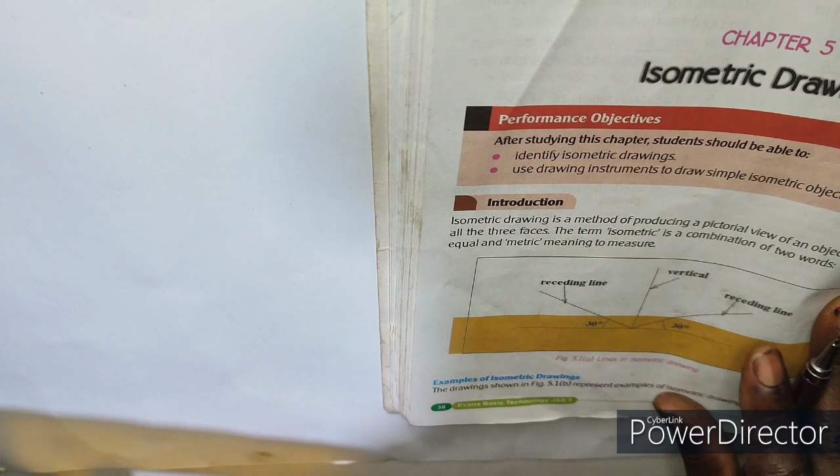To draw an isometric drawing, first, what is an isometric drawing? Isometric drawing is a method of producing a pictorial view of an object which shows all three faces. The term isometric is a combination of two words: iso meaning equal, and metric meaning to measure.

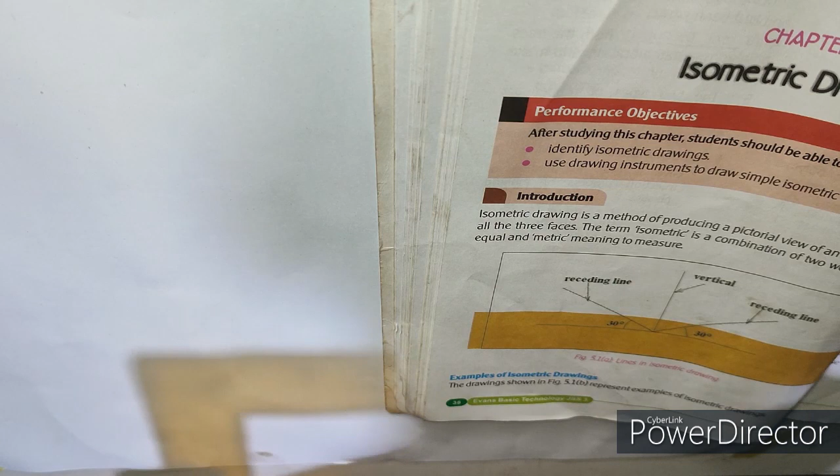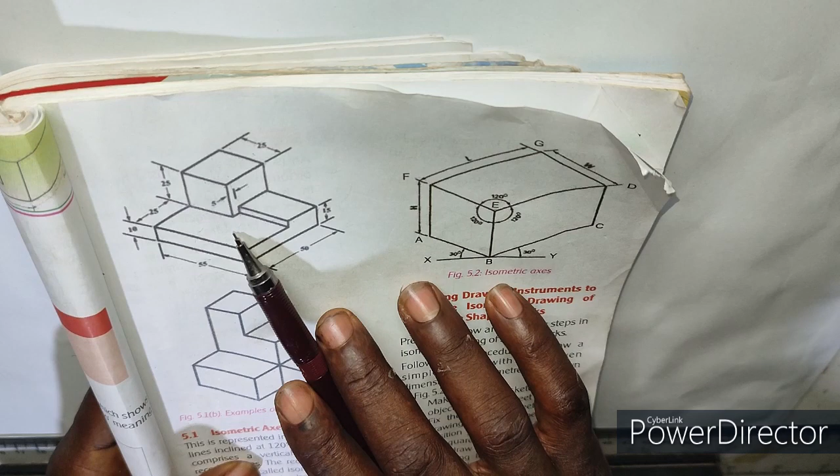First, you draw your plane of projection, or line of projection. Now draw a horizontal line, then locate a center, or the lowest point where the object is to start from. Now, the isometric block I want to draw, I will produce it as it is, like this.

So now let's see what the first step is. The receding lines, this line and this line, with the vertical ones. Now this is 50 millimeters, this is 55 millimeters. So let's draw that using the set square, and we use the 30-degree edge side. The 30-degree edge side is what we use in isometric.

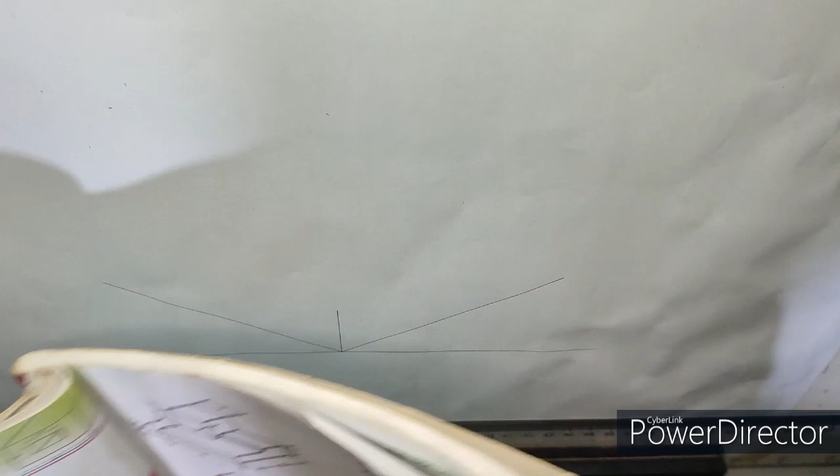Now, as you can see, my 30-degree set square is sitting on my ruler and on my T-square. So I'll produce the receding line to the right and left, without any measurement. Then this side too, without any measurement. Then the center, I'll produce it to be long, without any measurement. After drawing these receding lines and the vertical lines, this line is called the receding line, and this one is called the vertical line. The angle here between the plane of projection and the receding line is 30 degrees, 30 degrees, 30 degrees.

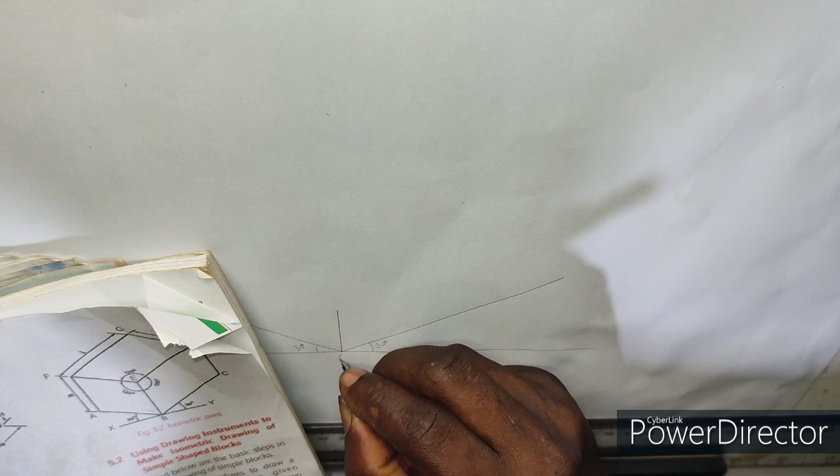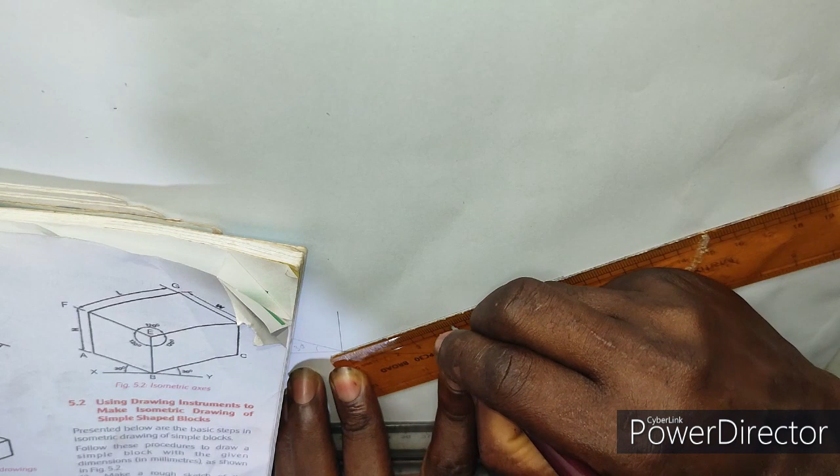I'll now take a measurement from here. This is my lowest point, also called the point of origin. I will now take my measurement. From the lowest point above is 50 for this side, as I've said. So this side is 50, and for this other side is 55.

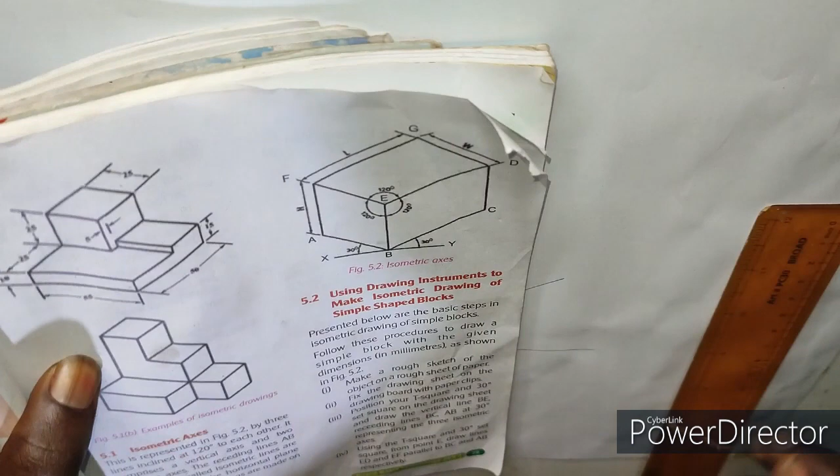That's 5.5 centimeters. Here it is. Good. So this side is 10. Now, this side is 10 from here. If this side is 10, then this side will also be 10.

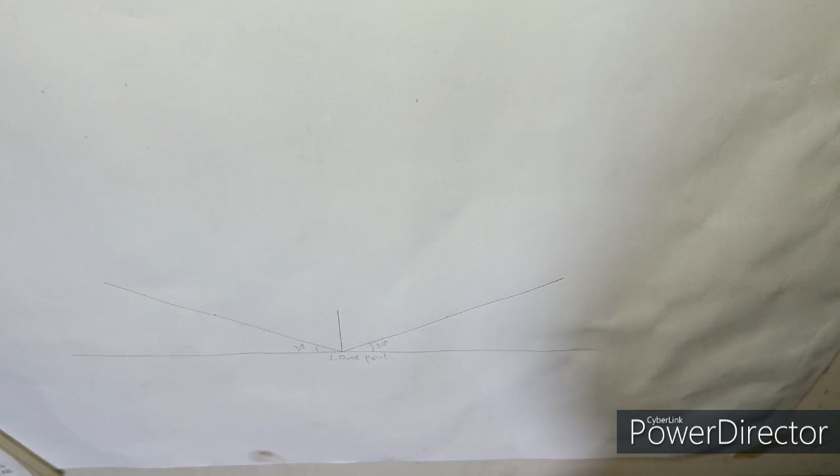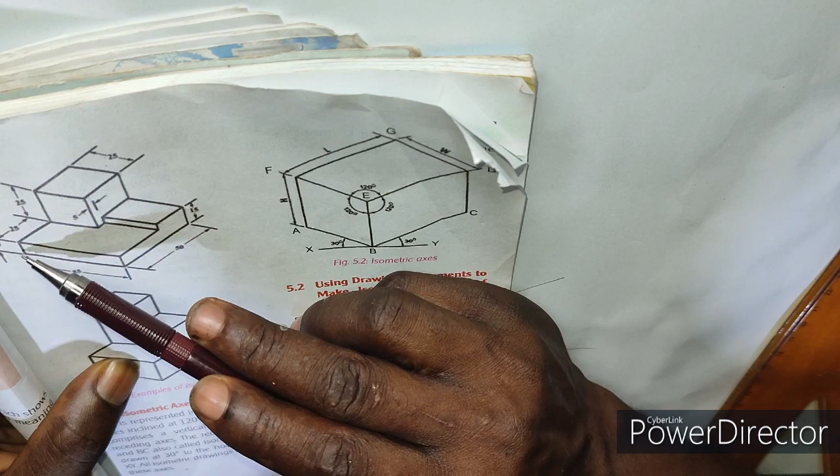So then after that, on those points now, I will make another drawing. On this point, I will draw another receding line above this starting receding line. This one is 55, so this one above will also be 55. Then I will also raise this point up by 10.

Once I draw this receding line, I will join it here, then produce another receding line towards this side. Meanwhile, from this point of 50, I will draw it up, a 3 millimeter line on it.

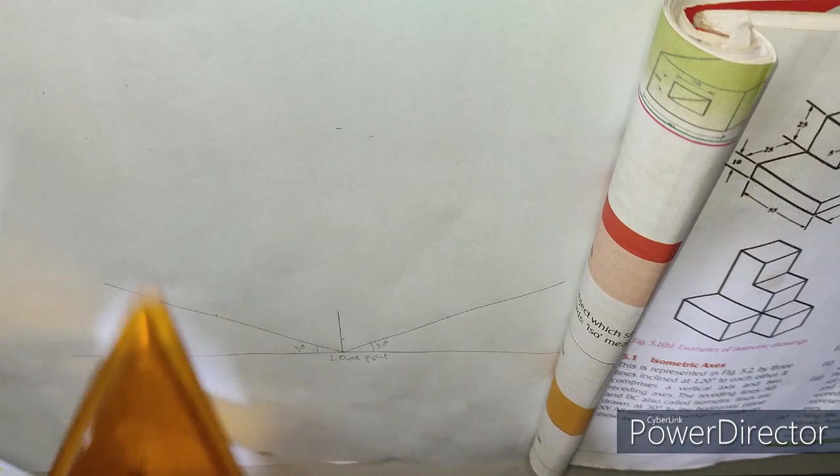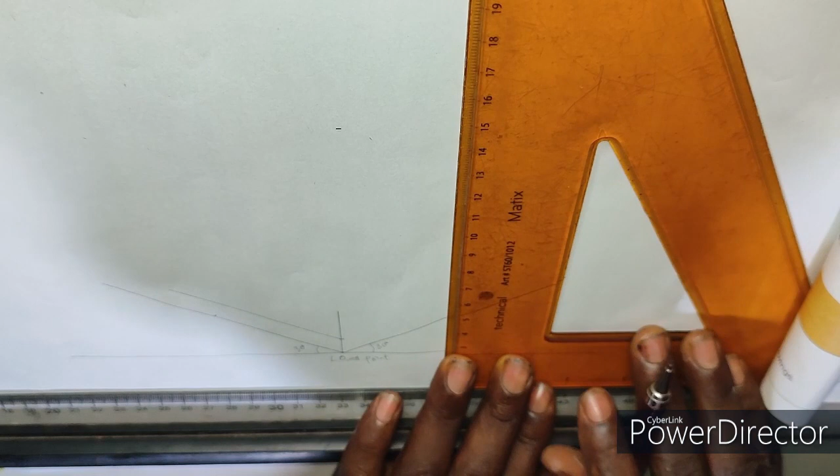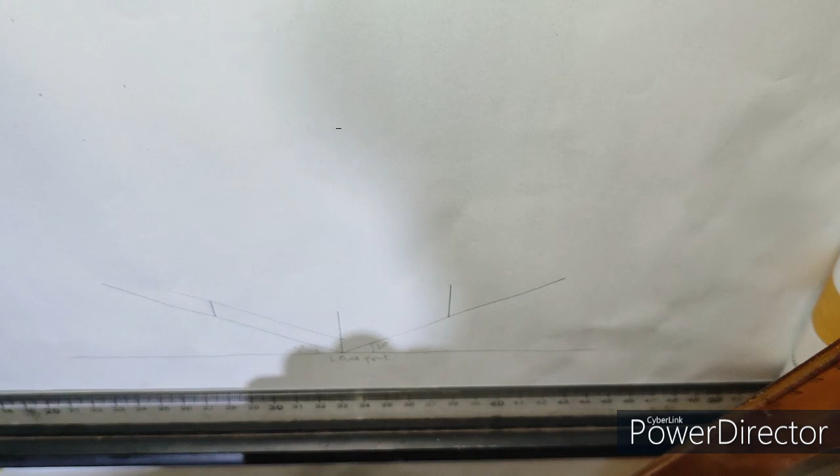On this side, I'll produce another line. Now here, I don't need to measure it again. Once I produce the line up vertically, it will be equal to this one because it's parallel to this. Then this side I will measure 15, that's 1.5. Is it here?

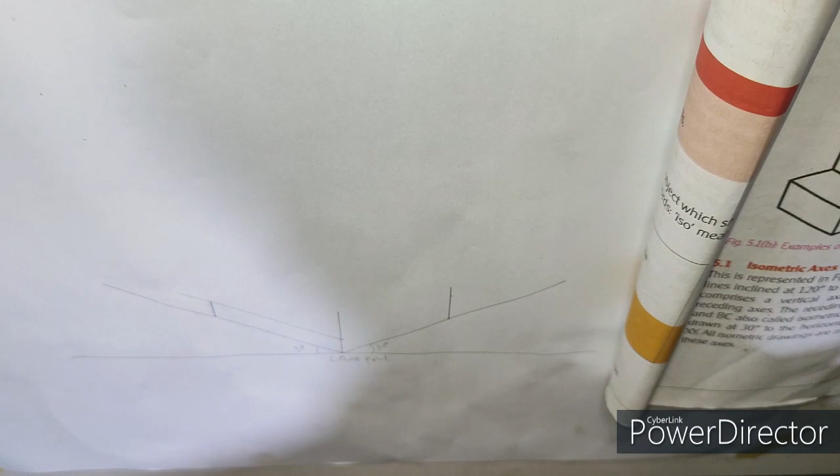Then I haven't done that. Then I'm coming to this side now. So I'm coming here now. I'll produce this one and this.

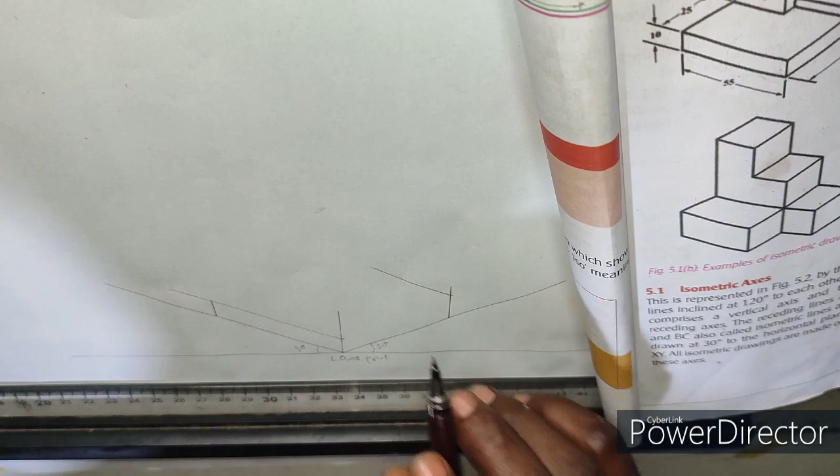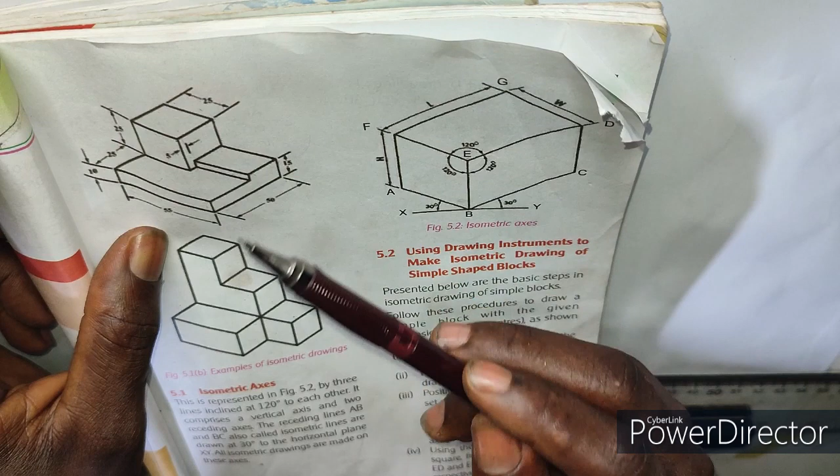How do I know the measurement that is meant to be here? Now, if you look at this side, this is 55. Then from here, this side is equal to this side. All these lines here are equal to each other. This side is equal to that side. So now we have from here to this point to be 25. Then from this point to this point is going to be 55 minus 25, which is 30.

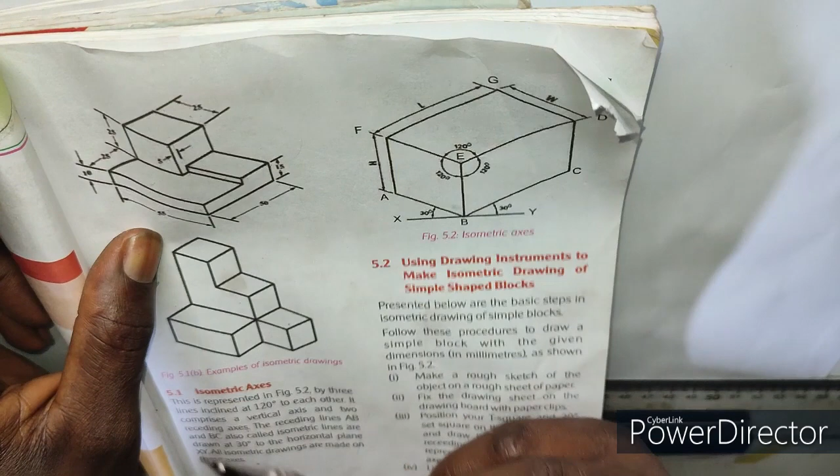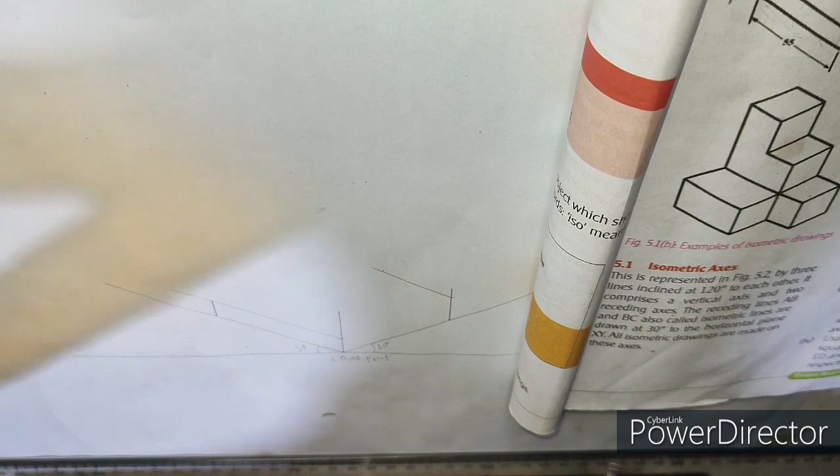So we have 30. This side is going to be 30. I'll measure 30. Here we go. So that's going to be 30. Once you have done that, you produce this side, and that side will take the measurement too.

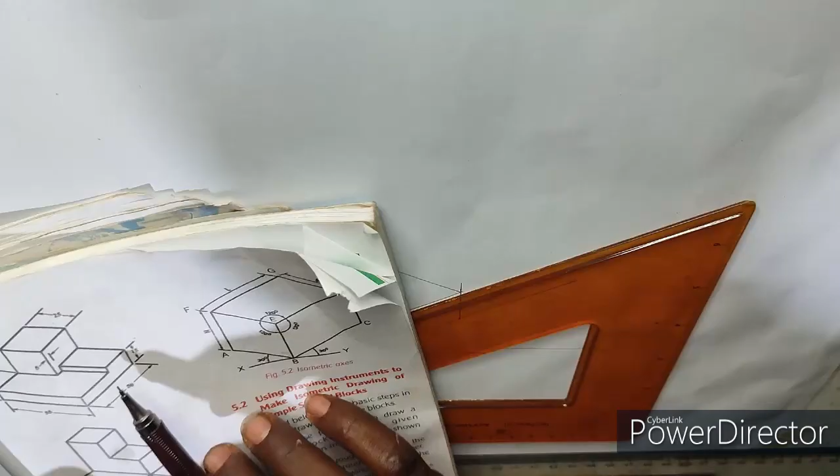I've taken this side and we know the measurement. We'll also draw it to this side. Good.

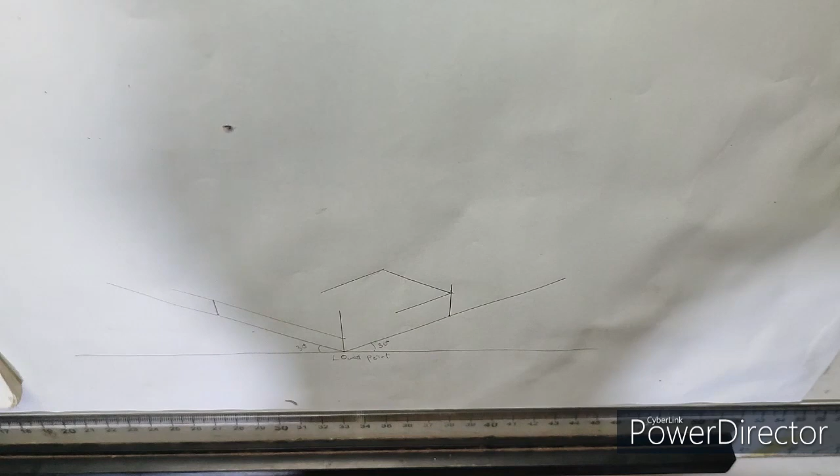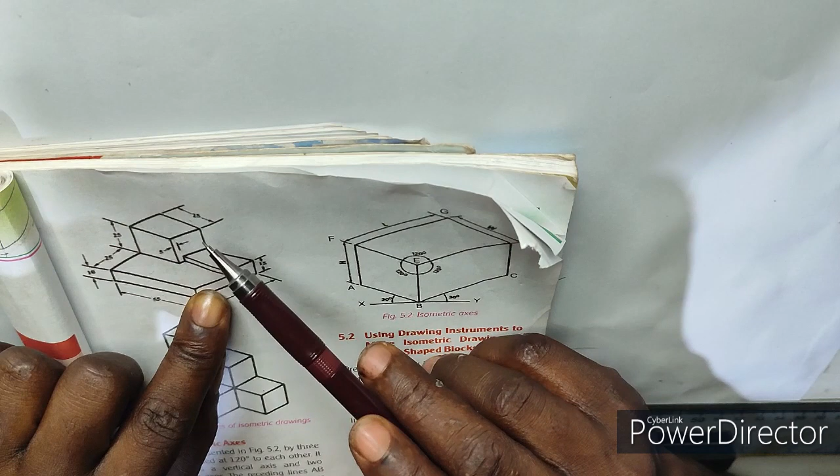Now I'm going to take the measurement also. What will be the measurement? If you look at this side, it's 25. This side is 25 because what we have here is a square. So if this side is 25, this side is 25, and here is 25 too. This side is also 25 and this side is 25.

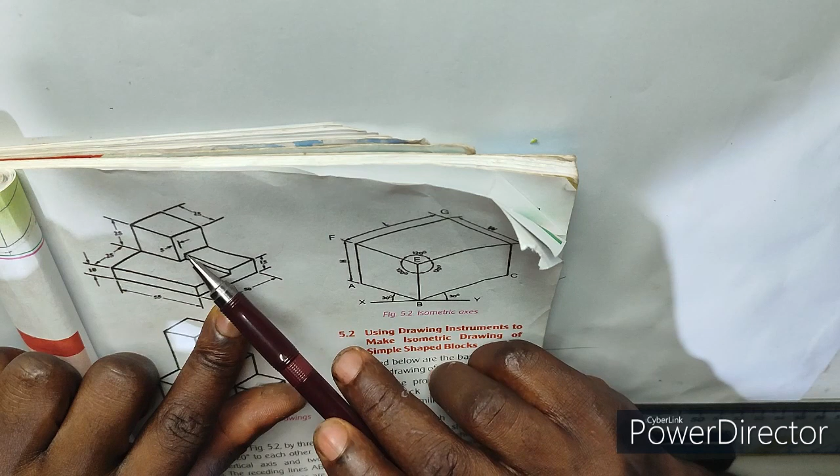Now if this side is 25, this bottom part is also meant to be 25, but as you can see from here, it stops here. We're given the dimension of the remaining part, that the remaining part is 5. From here to here is 5. So if this part is 5, taking that 5 away from 25 leaves 20. That means this part is 20. And if this part is 20, this part also equals 20. So this place is going to be 20 and this place is going to be 20.

So I'll measure this side to be 20, then I'll produce it downward. That's 20. I'm going to draw it this way.

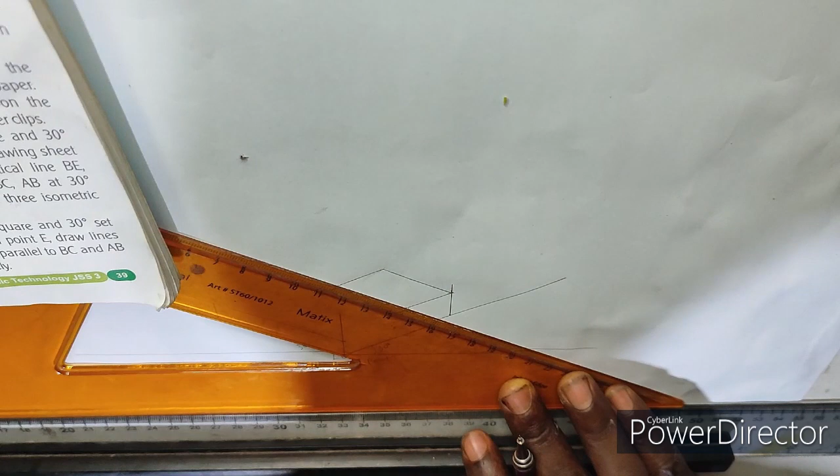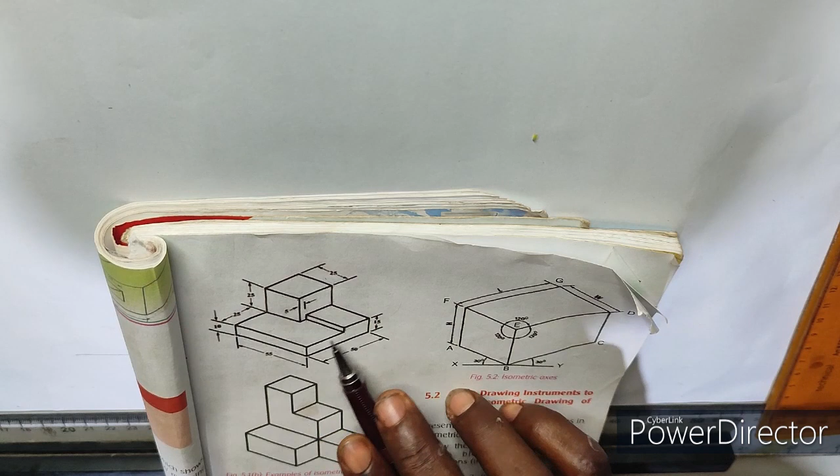Good, and this is the line here. Now this one, I'll drop it vertically downward. Before I drop it vertically, I'm going to draw this receding line that is above this 10 millimeter here. Then I'll now drop it, drop this point downward, to intersect with downward here beneath. Good, and this is it.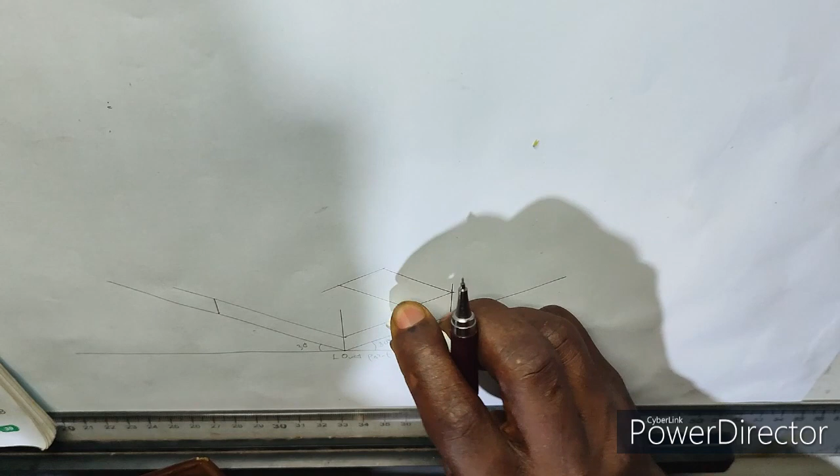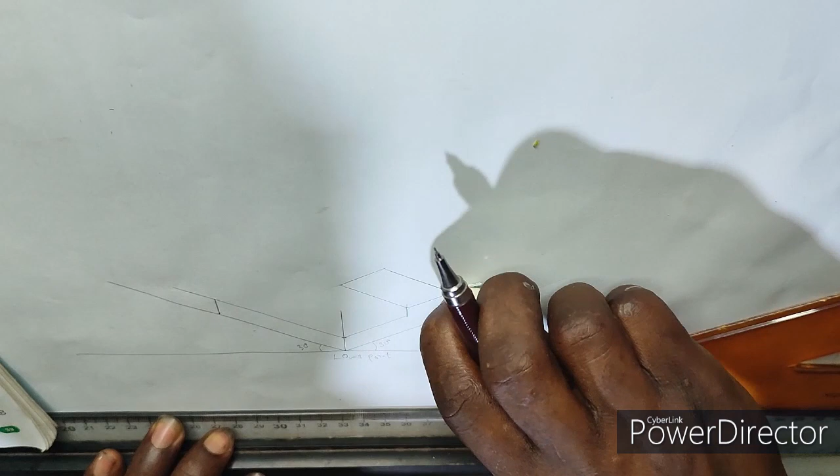Now all this line that extends more out is called our projecting line, or projection line. So it's what we erase at the end, after we've gotten the line we want, or the actual measurement that we want.

So now this part and this part and this part is done. We still have this part that is beneath here. Let's now come to this side. So we are producing it like this.

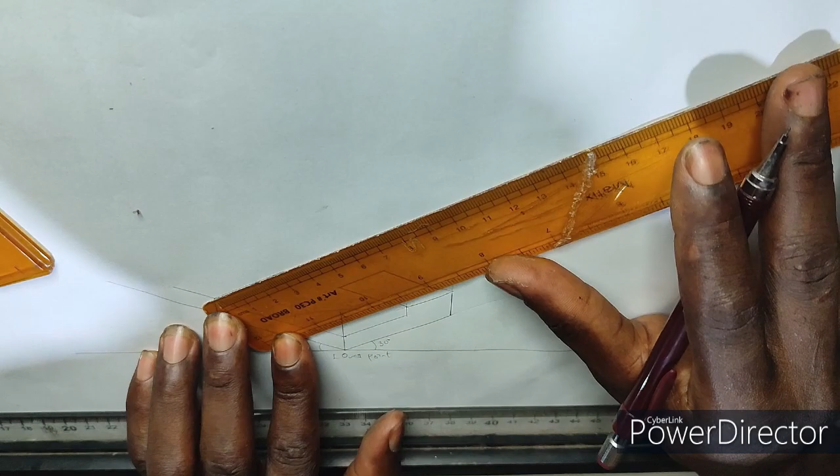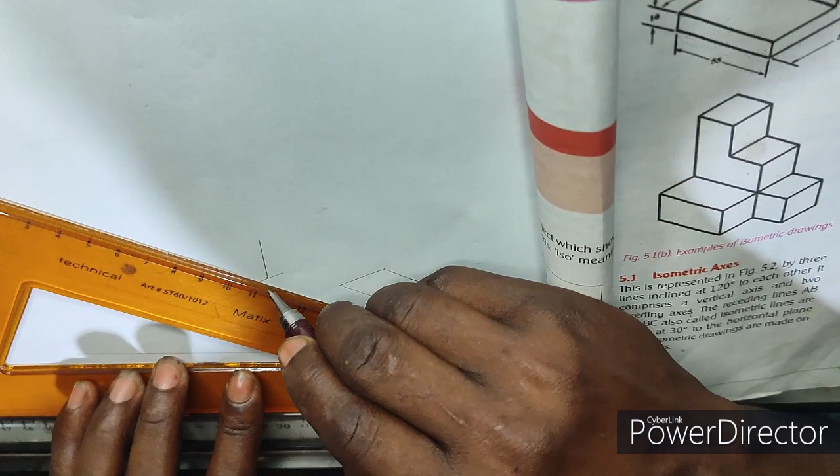All right, it has a dimension, this is dimension 25. Good, we produce this side, which is vertical, then we produce this side, which is the receding line going downward, like this, and it's also still 25.

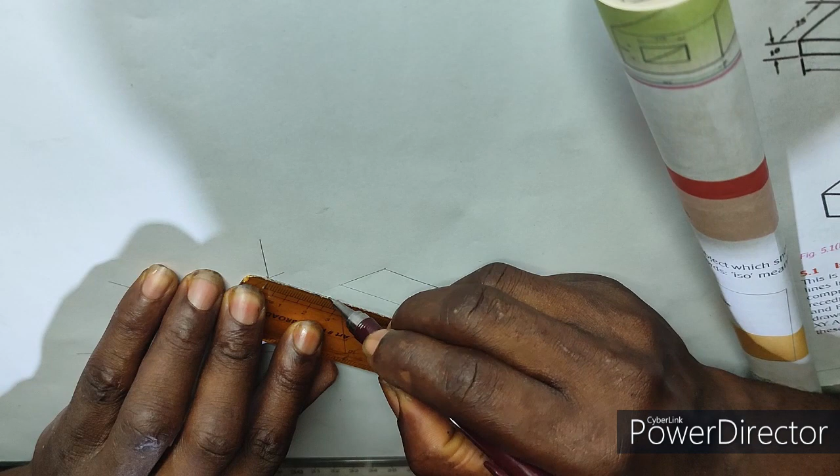Then take the measurement, because the two are 25, 25. Put your point there. I'm going to stop here. This 25.

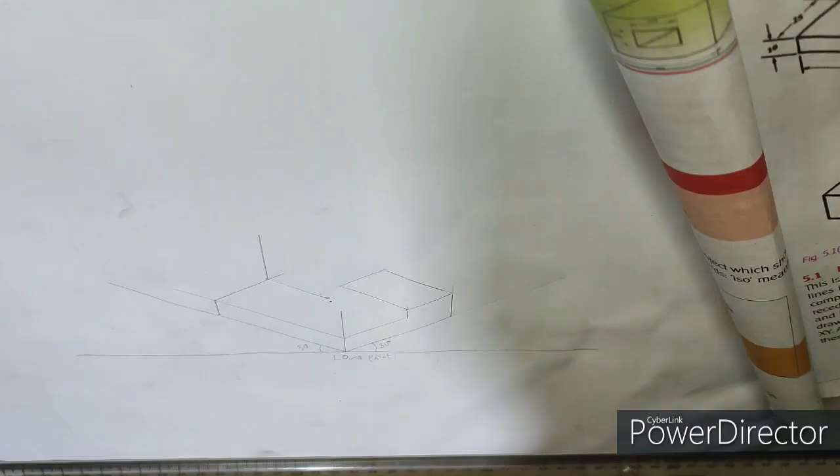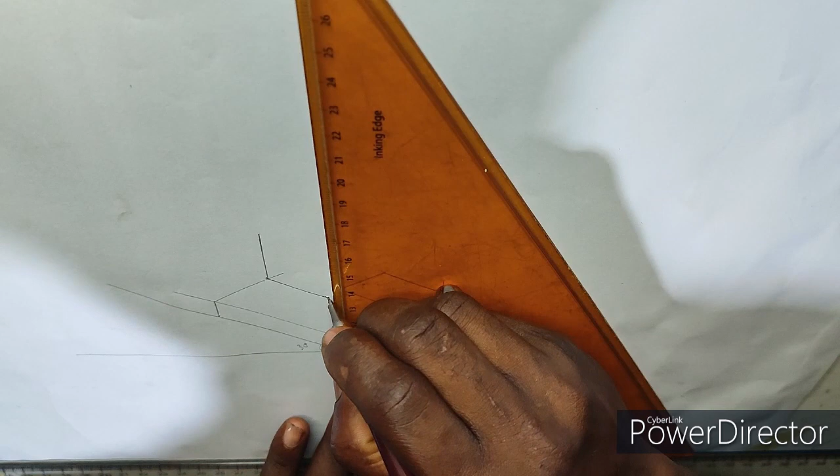Then this upper part. Then at this point there is also a vertical line, so I'll put the vertical line. Now this is 25 already, so I'll draw a receding line to it.

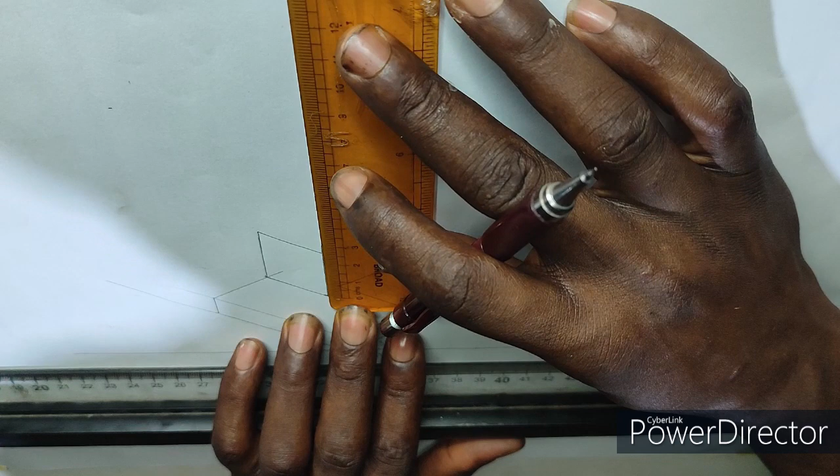Automatically this side is 25 as it is like that. Right, now I've gotten this side. Now it remains this side and this side.

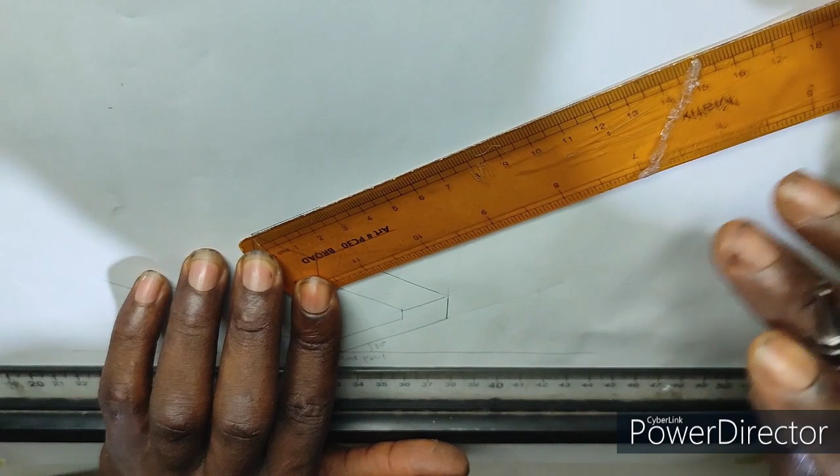So which is like this, taking it from here, this side too. All right, so I'll measure my 25 there. 25. Okay, I'm dropping it here.

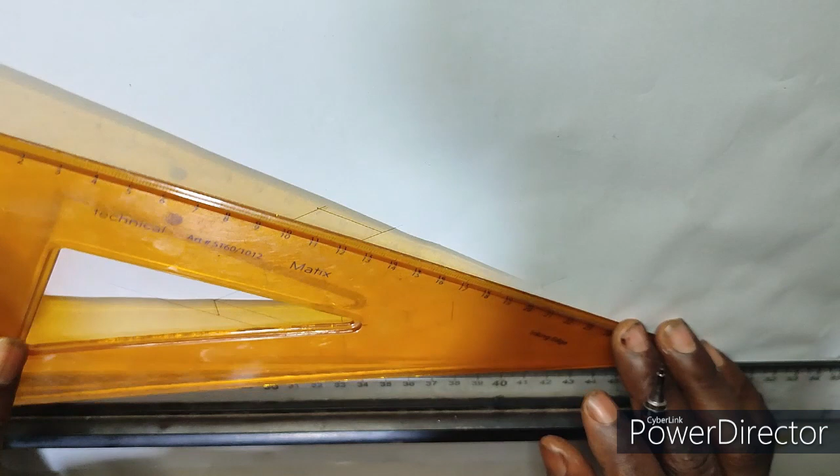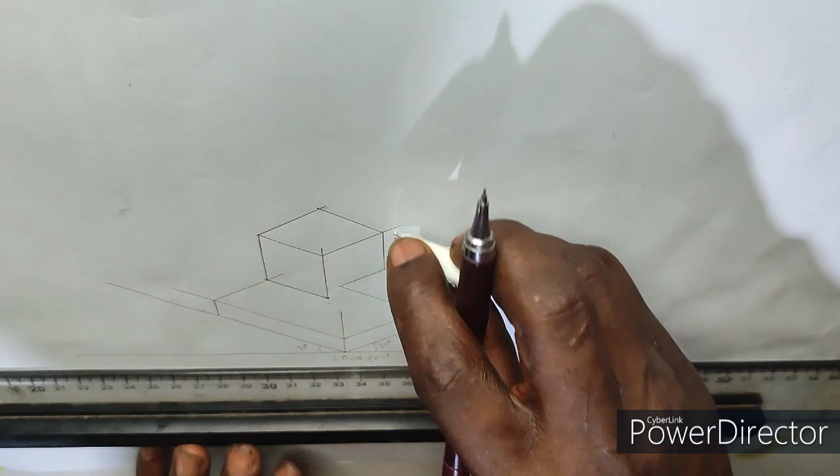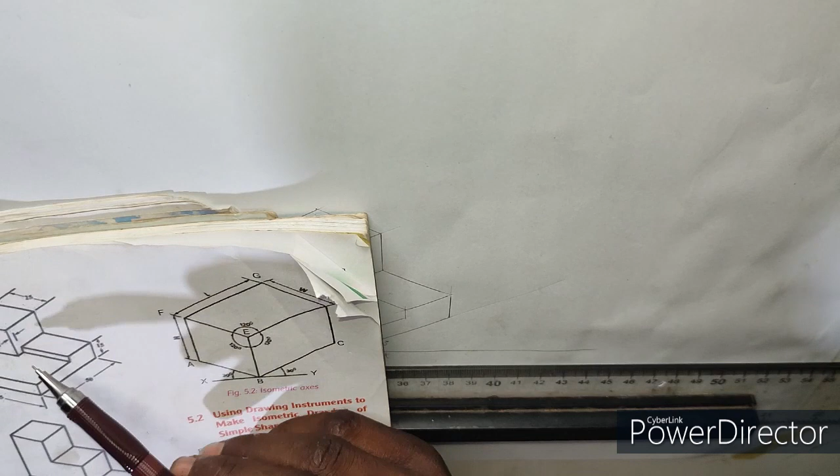Okay, we produce this side, we produce this part. So what is left? We have this side and this side, so just two lines more. So let's produce this one here.

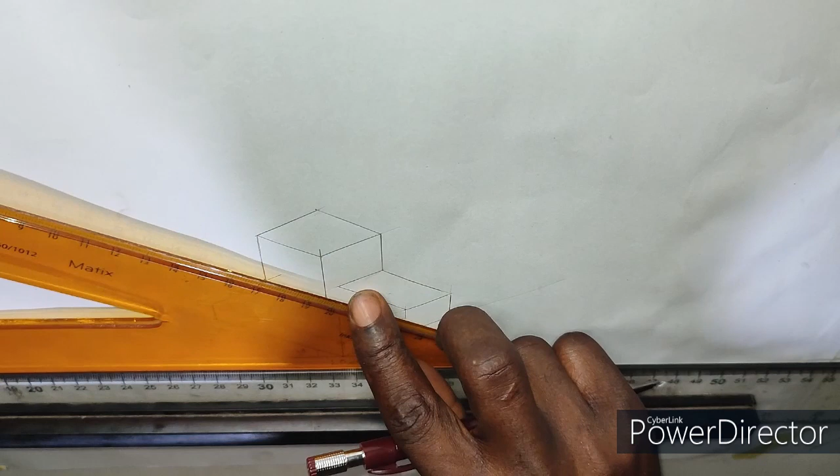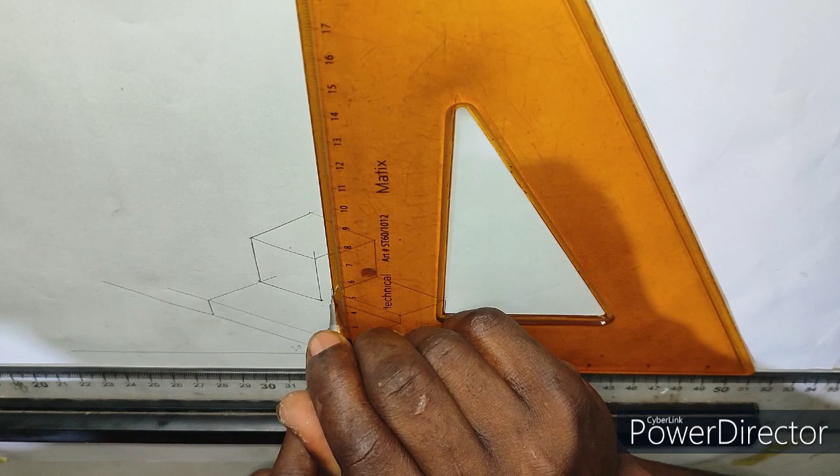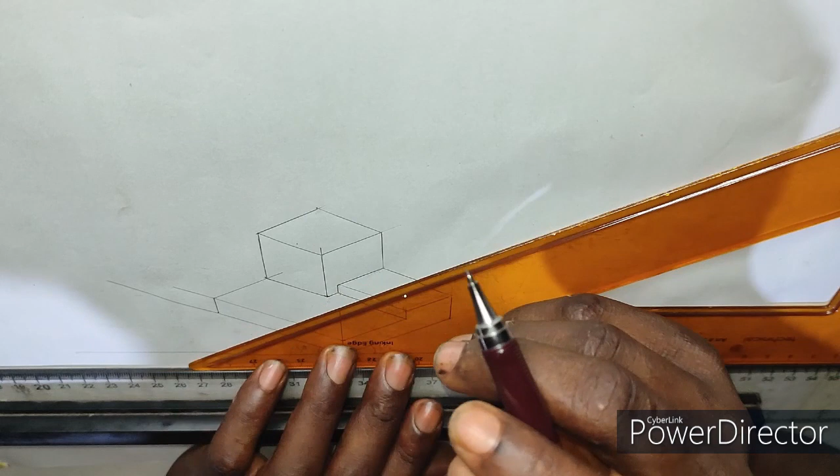And I'm dropping this part horizontally, vertically. So this side is, and line it to each other. Perfect, perfect.

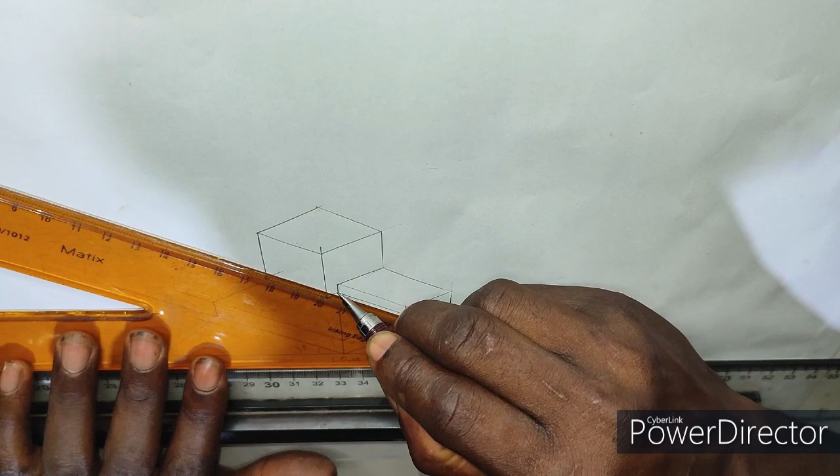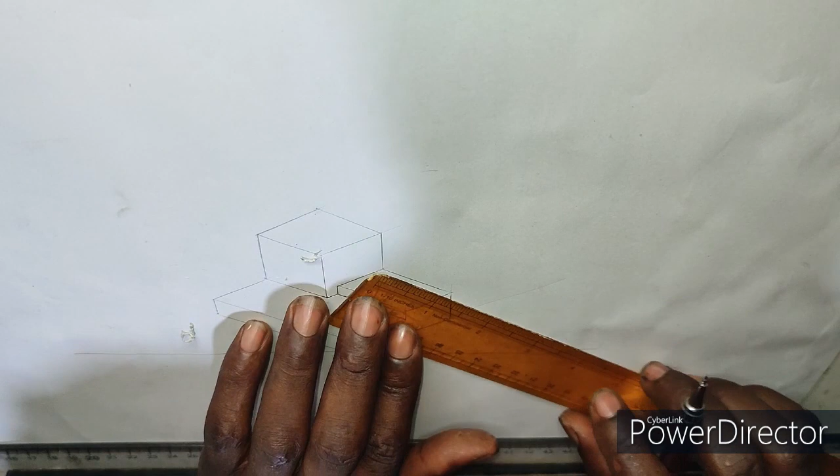We join together at a particular point. The line of our object is called outline. It's called outline. So as we erase the projecting line, we also clean the outline, we retrace it back, we retrace it back with our ruler.

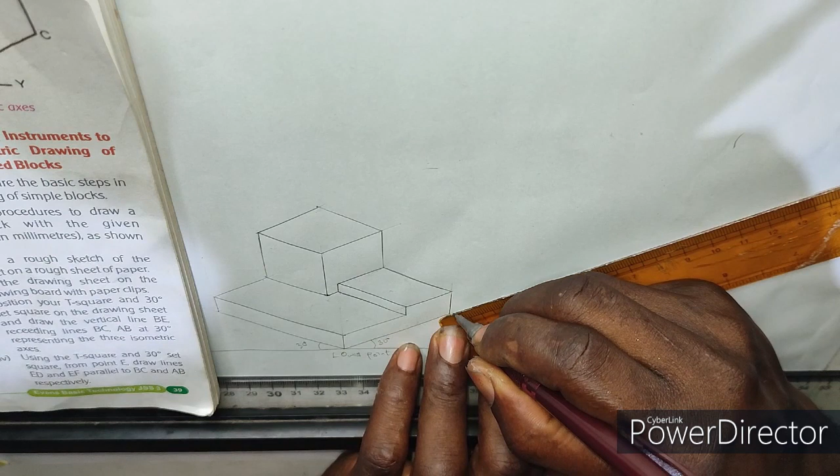And when you are putting your dimension, it's like a projecting line, but it's not going to be attached to your outline. So if we draw a line like this, it should align with the point, the corner, but not join the corner. All right, let's do this like that.

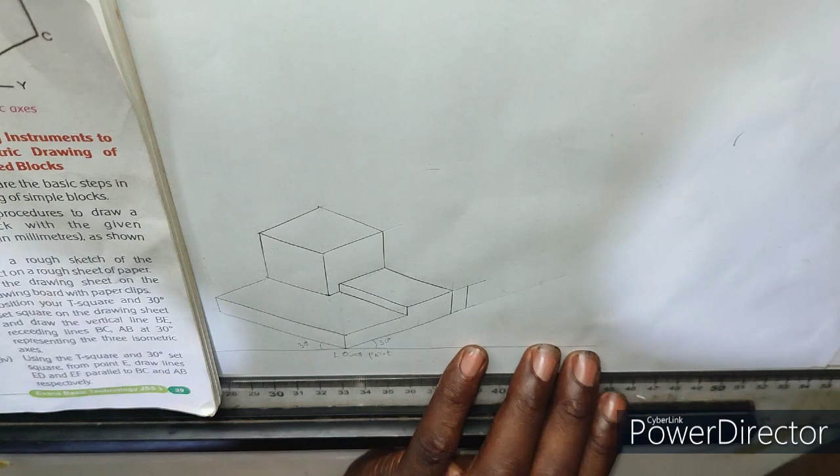This one is 15 millimeter.

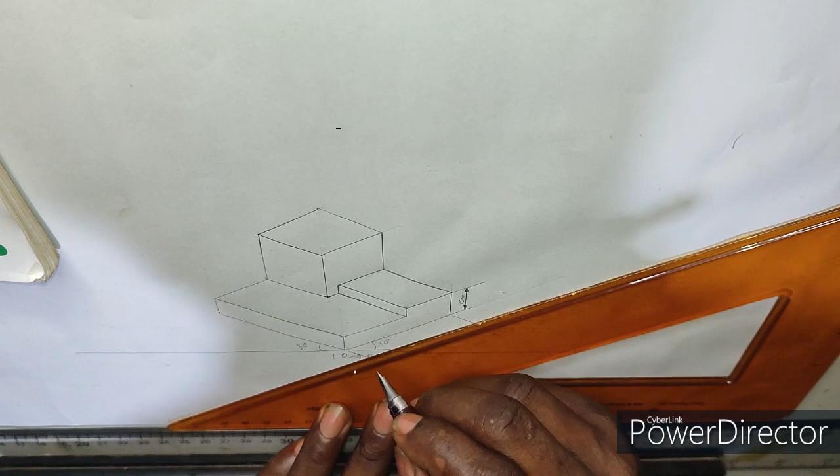This side is 50 millimeter.

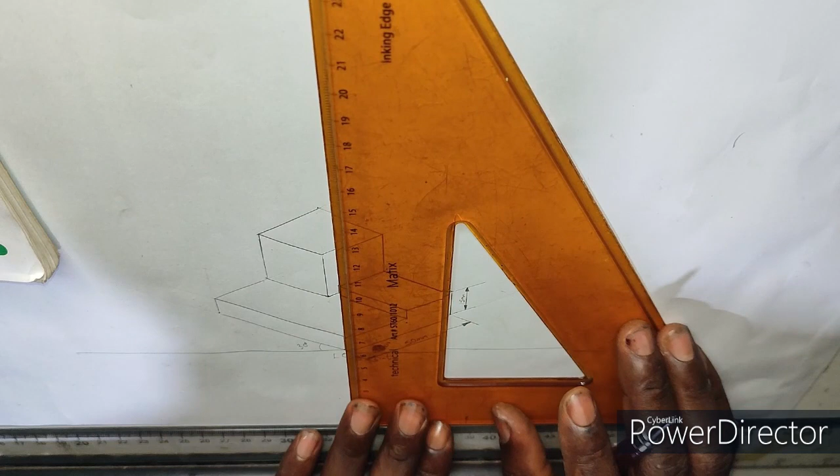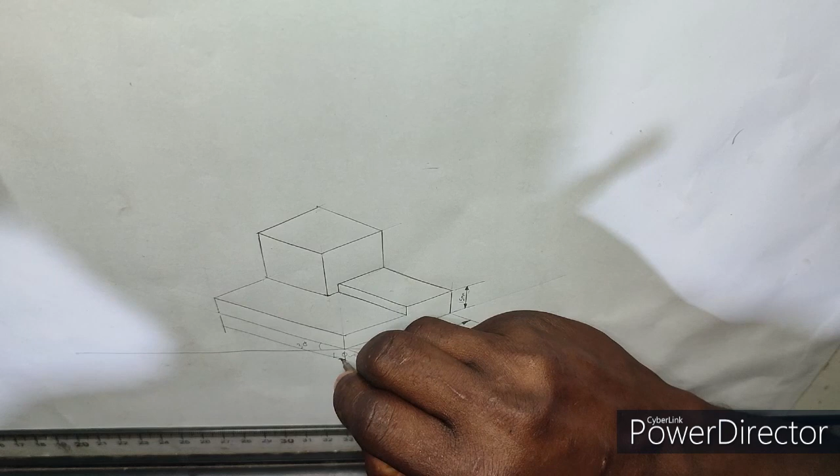This is 55 millimeter.